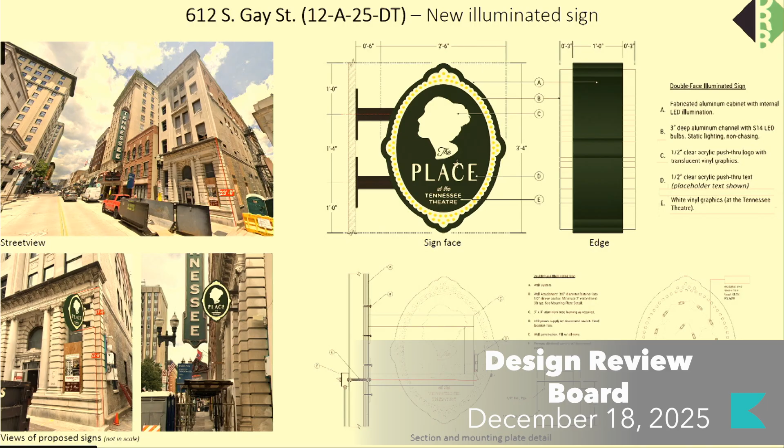Staff recommends approval of Certificate 12A25DT subject to one condition: submit final plans, including the number and spacing of the exposed LED bulbs and the acrylic letters displaying the name of the theater, for review and approval by planning staff.

Thank you, Samuel. Is the applicant present? Yes. Please do. Thank you. There's a little person button on there. There he is. Hello, how about now? Perfect. Okay, great, thanks.

Well, we appreciate your recommendation for approval. As you can see, this sign is kind of a cute little baby cousin of the Tennessee Theater sign. This is the property that you've probably seen in the media that was purchased by the theater two doors down and is to be connected in the rear of this building to the theater auditorium. So there is a connection on the upper floors to the theater itself, but the entrance from Gay Street that you see identified here is a separate small private and sometimes public venue that relates to the Tennessee Theater. So that's why you see a lot of similarities to the theater, but the scale is much diminished.

We don't have chasing lights. It's not the star of the show like the big Tennessee Theater marquee sign. So we appreciate your consideration, and those details that you've asked for, we'd be happy to submit once we've got the shop drawings ready. Okay. Thank you. Do we have any comments from the board?

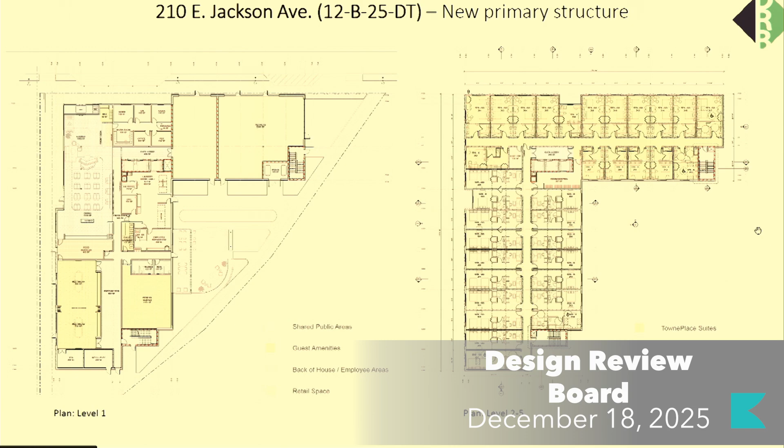The massing of the building includes a clear pedestrian-oriented bottom. The flat roof modern building showcases a contrast between dark gray and light gray color palettes, featuring bays of rib pattern cladding between window bays. The front elevation is divided by a vertical wall with space for public mural art.

The left section features dark concrete blocks and glass storefronts on the ground floor, dark gray brick between the second and fourth floor, and dark gray metal panels on the top 2 floors.

The right section includes glass sections and wood slats on the ground floor, light gray brick on the middle section, and dark gray metal panels on the top floor. Shallow metal canopies are provided at the hotel's main entrance and retail storefronts.

The same color palette continues along other elevations. The dark brick continues along part of the east elevation, while the light gray design extends along part of the west elevation. The rest of the building primarily rests on a foundation of dark concrete blocks with upper floors covered in white fiber cement board and battens.

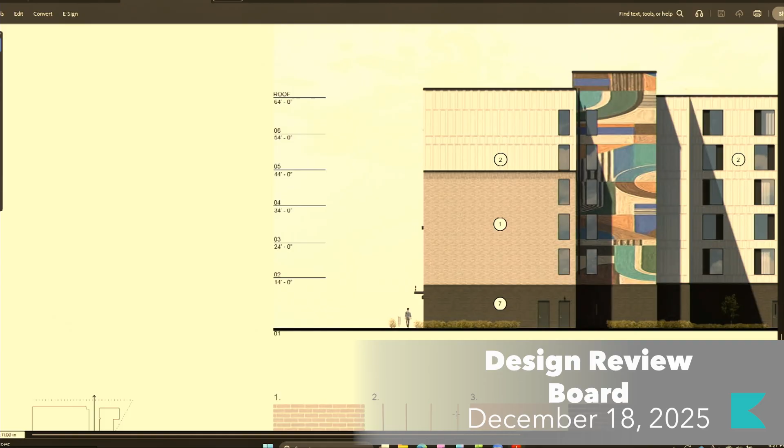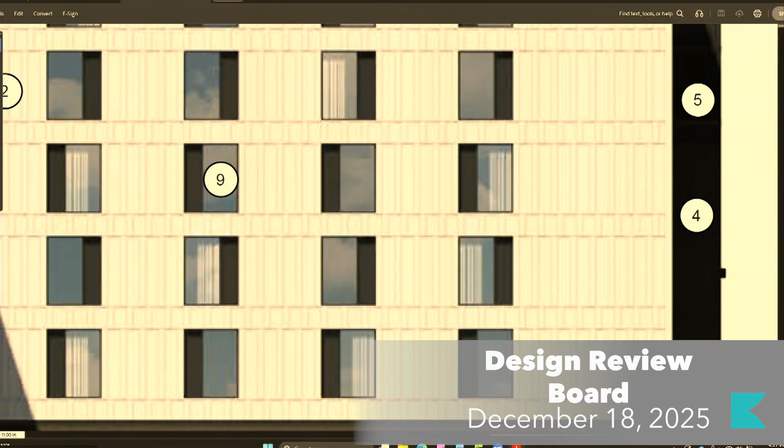Yeah, for me, I'm not sure, I can't speak for Cameron, but it's the horizontal shelves being created for debris piling up. I'd be curious to see some sort of recessed reglet or other joint condition at the horizontals. We do have a reveal at those locations, and we will have to break these at some point naturally, so I'm just trying to make sure I understand what the request is here. I do think we can accommodate what you guys are looking for, I just want to make sure I understand what it is you're looking for.

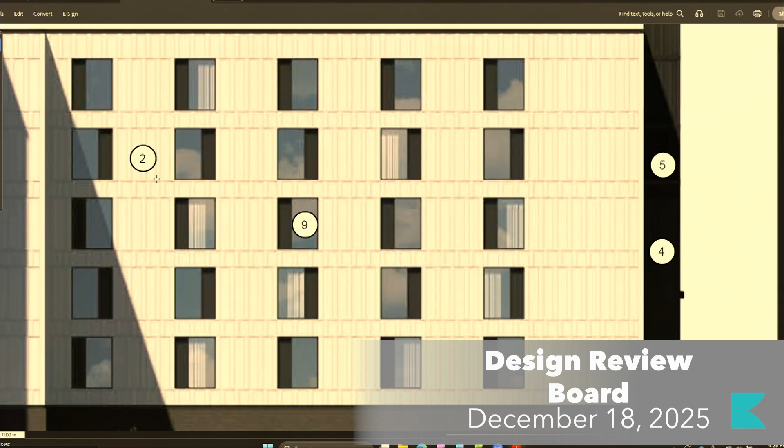I think the clarifying question is, do you have actual fiber cement horizontal pieces, or are those breaks between the panels flashed with some kind of metal joining piece in the horizontal, or are you actually bridging that gap with fiber cement? That horizontal would be a reveal, a flashing reveal, metal fry reglet. That is what that horizontal is. Gotcha, okay, that's very helpful. Thank you.

That's great. My last question is I love how you're incorporating color and art into the overall scheme. I'm curious what the materiality is of that art piece. Is that a vinyl graphic being applied, or is that actually built material into the art piece?

We've done this, or the development team, the client, has done this on other projects where they actually used a real plaster coat, a colored plaster coat. That could be a consideration. What I would recommend, and I should have brought this up before when we were talking about signage, lighting, and landscaping, is that this is also included. We plan to work with a local artist on this piece, and we would defer to them and what they're able to do. Once we find that artist is how I'd respond to that.

So that material is plaster or stucco? Paint, or it could be a plaster coat, depending on their capabilities. We would provide detail on that when we submitted the signage, landscaping, and lighting, because at that point we would have had a chance to interface with the artist. Okay, that's great, I'm glad you're using a local artist as well.

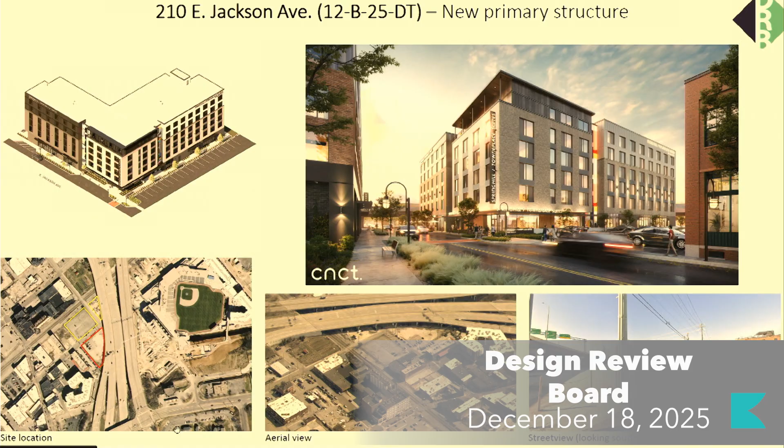We don't typically approve colors, so we approved the mural on the parking garage that Nick Cazana did, both. So I do remember that. Well, we're not an art committee, obviously. I think what the board is most interested in is how they're activating that space, and I think it's up to them ultimately how they do that. We just want to make sure it's not a blank space ultimately. I don't know if it goes to any other public art committee or not. It's not a public facility, I would suspect no.

Okay, but we do approve that it has some sort of color or other material. Yeah, on it, it's got a texture to it. The intent is that it's not just a white or solid color. Yeah, okay.

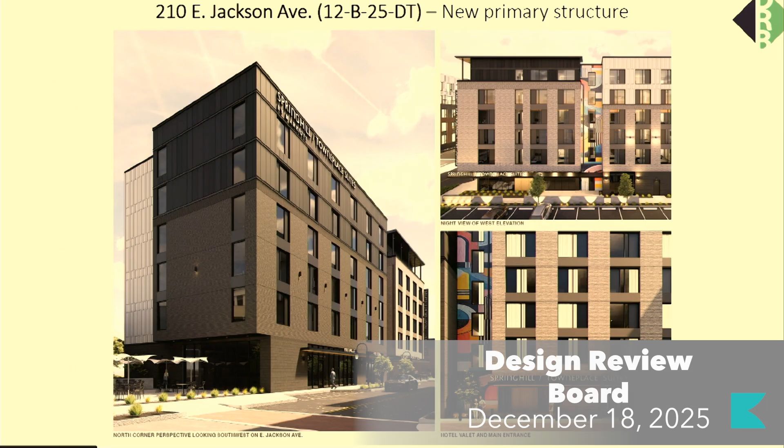So I think as a condition on the motion, I would want that to be stated what that material is. Tony, I agree with you. If we don't know what the art's going to be, and it doesn't go through any public process, it could be anything. So I think it needs to be shown what it's going to be. We did this the other day with the door. We were approving a future door that was to be designed, and we didn't know what the door was. So I think there needs to be a bit more clarity on what the actual object is going to be.

It could be anything. It could be Dolly Parton, which might be cool. I'll go back, though, to the parking garage we approved for Nick Cazana. We didn't approve either mural. We were told that there would be murals. There's a mural on the summer place that didn't come through us at all. So I think it would be irregular for us to decide what mural is appropriate. I wasn't on the board at the time, but I don't know about the Maker Exchange as well, because that has some kind of mural work on it. We did not decide what mural could go there as well.

I don't think we really have the expertise to approve murals, but I do want it to be stated what the material is, and I don't know if that will be part of the COA — is that a condition of the COA? It would have to be on the plan, and I think you could make it a condition that it be some kind of textured, painted, or whatever it might be space.

But the hard part is over time — 10, 15 years down the road, the next operator decides they don't want the mural there anymore, and they paint it a certain color. So longevity-wise, we don't know what it'll be. If it's a space that, if it is more of a solid color, is that really going to be an issue or not? So it's hard to regulate painted surfaces, unfortunately. That's a good point, Mike. You're saying we have to, if we approve it as is, we can't necessarily say this is forever to be a mural. It's to say, if we squint our eyes and it's dark gray, does that still hold up as a design?

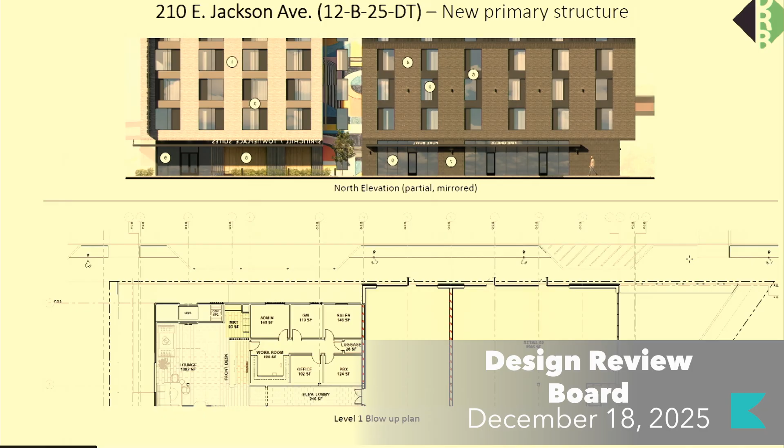Yes, agreed. And I appreciate that note. I think there will be some quality of life changes when we submit the landscape, with that being one of them. I agree that it starts to create a pinch point there. The scale that's shown on the plans is certainly not the intent. The scale is for that to be much closer and tighter to the building, so that you have plenty of room to maneuver for people who are dropping off.

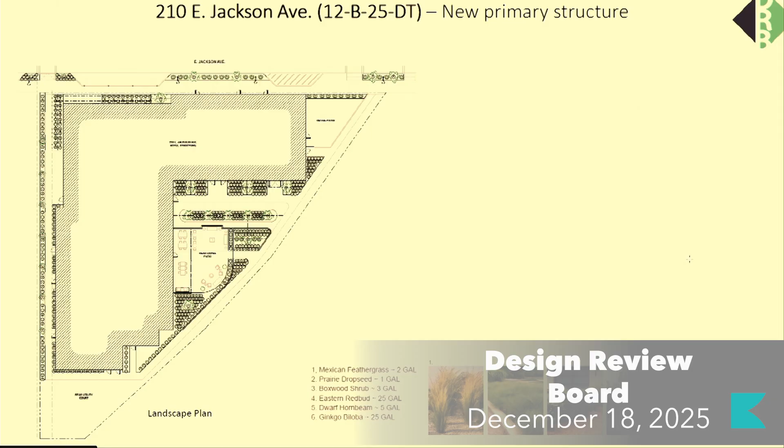Thank you for that. Does the board have any more comments or questions? I have one final question about the rooftop strategy. Is there equipment on the roof, and how tall is your parapet to cover any sort of equipment that's there?

Yes, there would be equipment on the roof. It would be located central to the roof, and the parapet—I could go back and confirm—but it's about 4 feet, and it would cover the sight lines, the vast majority of sight lines, even from James White Parkway. So we'd be looking at it from James White Parkway, that would be the highest point at which somebody would be looking towards the roof.

Is the only equipment that will be there the ones shown on the Axon view? Those two, yes. I will say that equipment is not finalized in terms of the engineering, and so we'll be sure to meet all the standards and requirements for visual barriers, down to the final equipment design. Okay, great. I mean, if it's minimal and central to the roof, I think it wouldn't be visible, but if it is visible, I would definitely want to see what any sort of screening might look like. Yes, our goal would be for it to be screened entirely by the parapet, and so locating and sizing the parapet appropriately to screen that equipment from view is our expectation. As we have the final equipment specification, we'll confirm that.

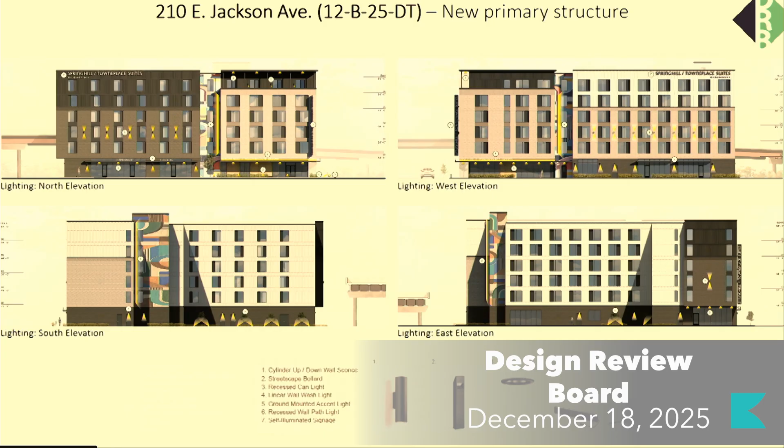Okay, does anybody have anything else? Does anybody not on the board have anything to say? Okay, then we're going to entertain a motion.

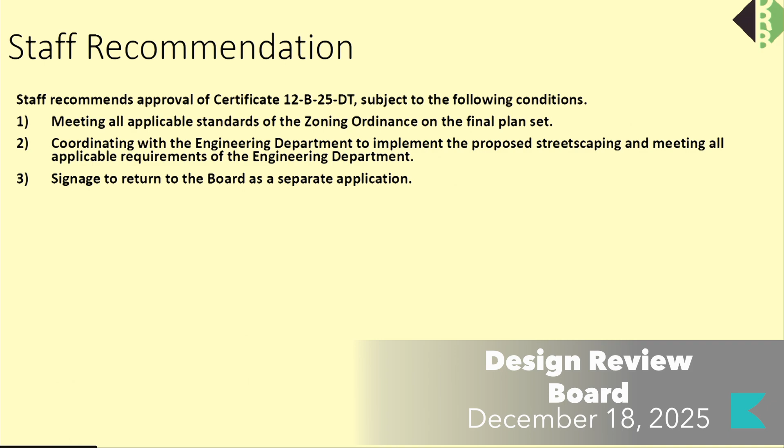I don't think I can make a motion. I would like to make a motion to approve per staff recommendation, but add Tony's element that the material be called out for what the mural will be placed upon, what that material is.

Did you want to add the lighting to condition number 3, to come back? Yes, have the lighting come back with the landscape. I think the material could also come back with that submission as well, right? The material of where the mural's going.

I'm fine with that being staff approval, I think, if you clearly state. We're told that material will be plaster, right? That's what I think I heard. John mentioned several different possibilities. I think if it's plaster and we just go with plaster, that's fine. Can you clarify that as submitted, it's intended to be plaster? Yes. Okay, so calling that material plaster.

I'd second, and want to add, I guess this is the fifth or fourth condition. Do we add another one? Fourth condition, about the board and batten, and this could be staff approval, but to submit an alternate layout or design of the batten, or a flush panel reveal fiber cement system for the fiber cement area of the project.

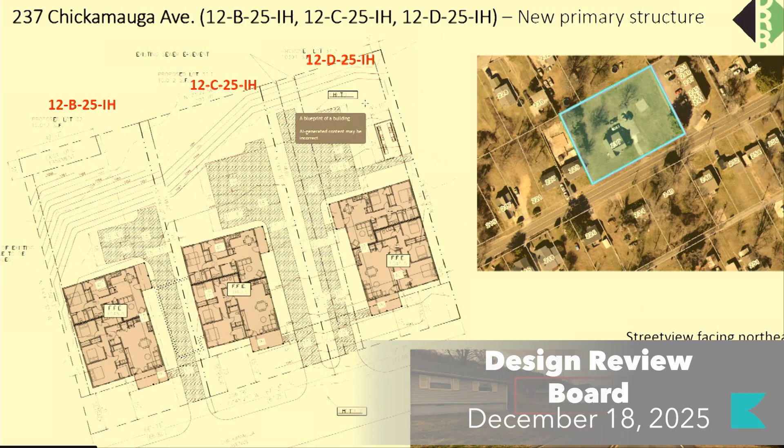Each duplex features a parking pad in the rear, accessed via driveway off of Chickamauga Avenue, which meets guidelines for placement. However, the 5-space parking pad for 12D 25IH is large in scale and exceeds middle housing requirements. The size should be reduced to the minimum for 4 parking spaces.

The 40-foot wide by 55-foot deep duplex is generally wider than most houses on the block and is 5 to 10 feet deeper, except for the adjacent townhouse building. The depth is the maximum approved by middle housing and is appropriate for the duplex form.

A recessed or projecting feature will need to be added to one of the side elevations to meet middle housing standards. Final drawings should include accurate foundation heights and renderings for each duplex.

The depth and supports of the front porch meet the guidelines. The porch should rest on a block foundation instead of open posts.

The roof meets the guidelines. The depicted details should be retained.

All elevations feature sufficient transparency. The lap siding, parge-coated block foundation, and asphalt shingles are appropriate.

However, 3 siding materials are used on the facade, and there is no break in the massing to provide a transition for the proposed board and batten.

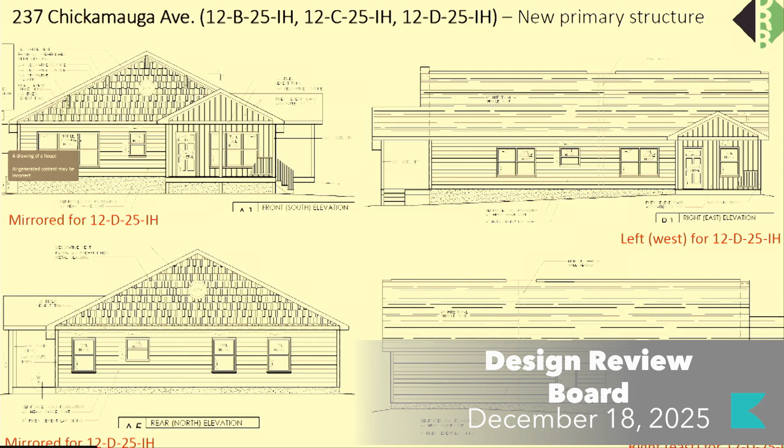Lap siding should be used as the primary siding material along all elevations with the same accent siding in all gable fields. Additional measures should be taken to introduce variety to the 3 almost identical duplexes, which can include variations in roof forms, accent siding, and colors.

So staff is recommending approval of certificates 12B 25IH and 12C 25IH, subject to the same following conditions: the final site plan to meet city engineering standards, the front setback to be increased to meet middle housing standards.

To be approved by staff, meeting Article 4.6 and Article 9.3J, and introducing a recessed or projecting feature on the left elevation to be approved by staff.

The final site plan to include a native or naturalized shade tree in the front and rear yards, using the existing trees unless removal is necessary for construction. Final elevation drawings to include the foundation height along the rear elevation and accurate renderings for the 3 adjacent projects.

The porch to rest on a parge-coated block foundation, accent siding to be used only in the gable fields and to be consistent along all elevations, varying the roof forms, accent siding, and color to differentiate from the identical adjacent duplexes.

To be approved by staff, retaining the rake mold trim, gable base trim, gable vents, architectural brackets, and accent siding, the final plat to reflect the submitted site plan, meet the subdivision regulations, and be approved administratively in a separate application.

Staff is recommending approval of Certificate 12D 25IH, subject to the same conditions, but modifying Condition 1 to add here that the parking pad be reduced to the minimum size for 4 spaces.

Modifying Condition 3 to call out the right elevation, and Condition 5 to require accurate renderings of the mirrored plan.

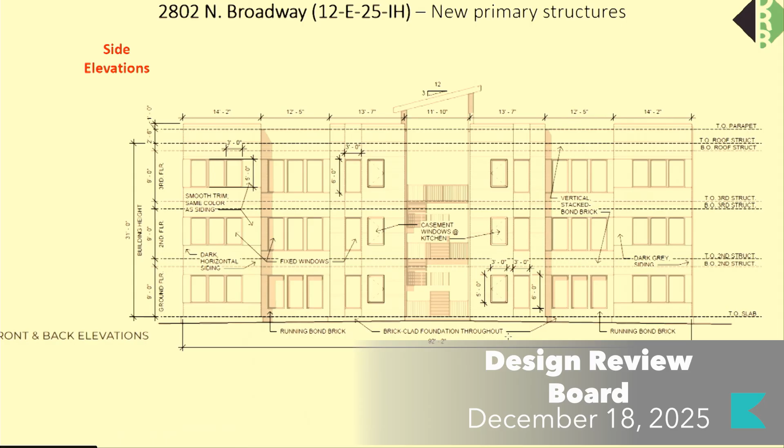Both depicted parking lots are included in this application, but the 3rd building will need to be reviewed in a separate application. Rezoning this adjacent property to RN5 could create additional zoning issues with the current plans. The front and rear elevations are labeled as the side elevations on the plans, and the side elevations are labeled as the front and back elevations. The setbacks are not specified, but there are issues meeting the build-to-zone percentage and side setbacks of the property zoning that should be resolved before the case is approved.

Additionally, the property has a cross slope rising approximately 20 feet from west to east. The grading plan is not clear, and details are not provided for the detention pond, with notes indicating these elements will be finalized later by a civil engineer. The current site plan and setbacks could be significantly affected by necessary revisions to meet city engineering standards and stormwater requirements. The proposed driveway running in front of the buildings and the parking lots adjacent to the buildings does not align with the design guidelines, which state that parking should be provided behind apartments, and that on streets without alleys, parking pads should be at least 20 feet behind the front facade.

Plans review and inspection expressed concerns about the access. The board should discuss the parking and driveway placement and whether additional measures should be taken to reduce the size and visibility of the parking. The landscaping includes the shade trees recommended by the guidelines, shrubs around the perimeters of the buildings, and buffer yards along the south lot line that abuts a rear block of single-family houses.

Existing trees are marked to be preserved along the north and south lot lines, which aligns with guideline recommendations. The applicant provided a tree survey and more landscaping details yesterday, found at the end of your packet. Revisions to the Class A buffer will be necessary to comply with the landscaping ordinance.

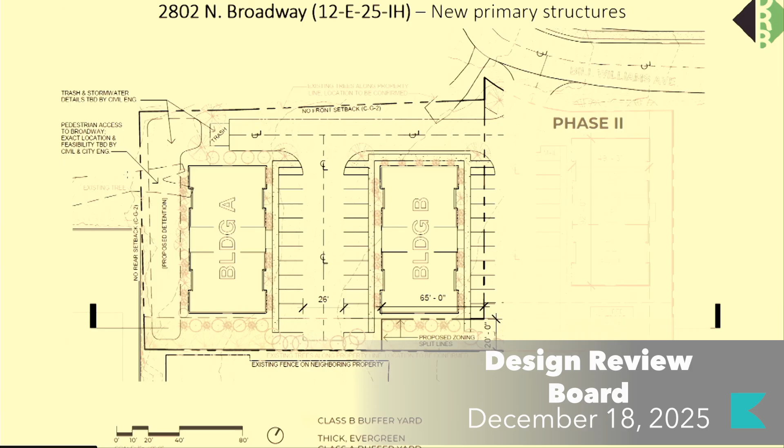The site plan includes sidewalks along the perimeters of the parking lots and a potential pedestrian access to North Broadway over the detention pond, as depicted on the west lot line. Guidelines recommend that new construction feature a walkway to the street. Pedestrian access to Bill Williams Avenue should be provided, and the applicant should coordinate with city engineering to confirm the feasibility of the pedestrian access to North Broadway.

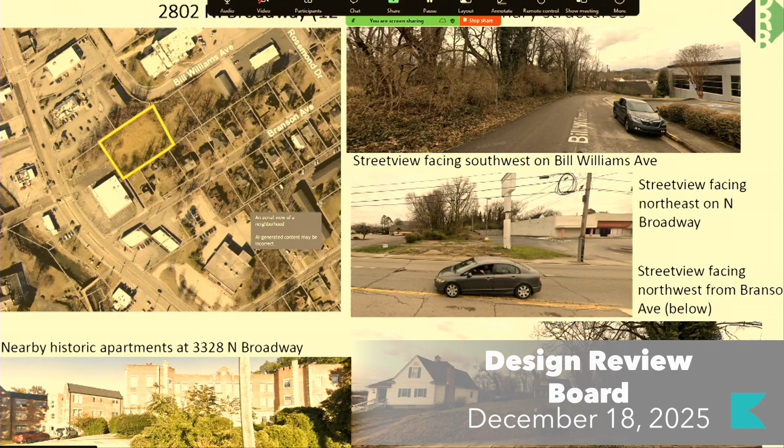The guidelines for multifamily housing recommend that new multifamily buildings be designed in scale and context with the early architectural features of the neighborhood. The block only features commercial and office buildings, and Branson Avenue to the south primarily features craftsman bungalows. Most nearby apartments are 2-story with brick cladding dating from the 60s to the 80s, with the exception of two 3-story Tudor apartment buildings from 1928 at 3328 North Broadway with elaborate parapets and masonry detailing. These are about a half-mile away.

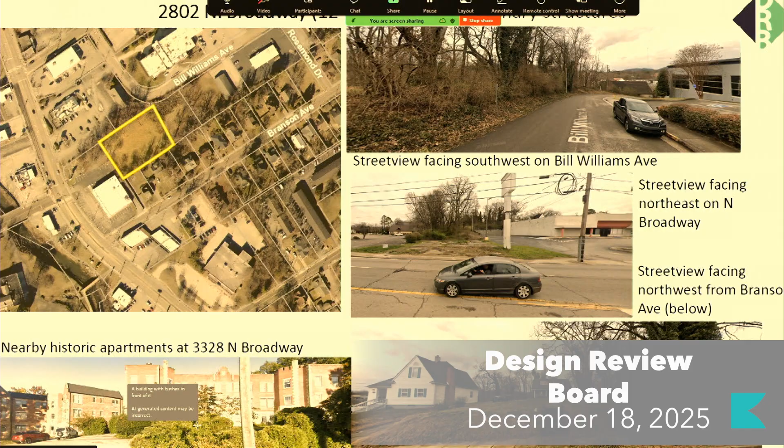The proposed buildings are modern in style, but they incorporate brick cladding with alternating bond profiles to align with the context. Variations in the proposed parapets, such as the crenellations and gables on that historic apartment building, could add visual interest to the front elevations and increase compatibility with surrounding residential architecture. The 3-story height is appropriate within the surrounding non-residential context.

However, separate drawings should be submitted for each elevation, and the final drawing should be unique for each building and accurately depict the foundation along grade.

Guidelines recommend using porches, bays, and breaks in the front facade to create massings divided into separate sections that are proportionally similar to the original houses on the block. This is achieved by the alternating modules, the brick and siding, and the clerestory massing. However, a recess and/or projection should be added to the flat front elevations.

The applicant should coordinate with plans review and inspections about any necessary revisions to meet the principal use standards for multifamily development.

Guidelines for single-family and multifamily construction encourage incorporating porches or stoops with proportions compatible with the context. The open central staircase massing is oriented towards the side yards and is accessed via a small concrete walkway from the parking lot in the east elevations. Multifamily buildings recently approved within the overlay have included porches large enough for seating at shared and individual entries. The board should discuss whether revisions to incorporate a porch element are necessary, such as providing space for seating, emphasizing the entrance on the central massing, or adding a shared patio space on the front elevations.

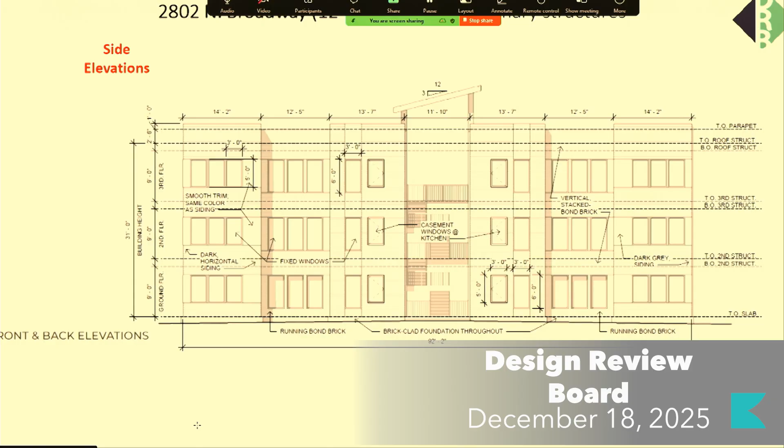The building features a flat roof with a shed roof clerestory, which is appropriate for a modern multifamily building. The side elevations feature shorter parapets on the recessed brick massings, but the parapets on the front and rear elevations do not vary in height. Variations to the parapets and clerestory roof forms could be used to differentiate the buildings and incorporate contextual architectural features. The horizontal siding and brick cladding meet the design guidelines, and the design benefits from the brick detailing, which should be retained.

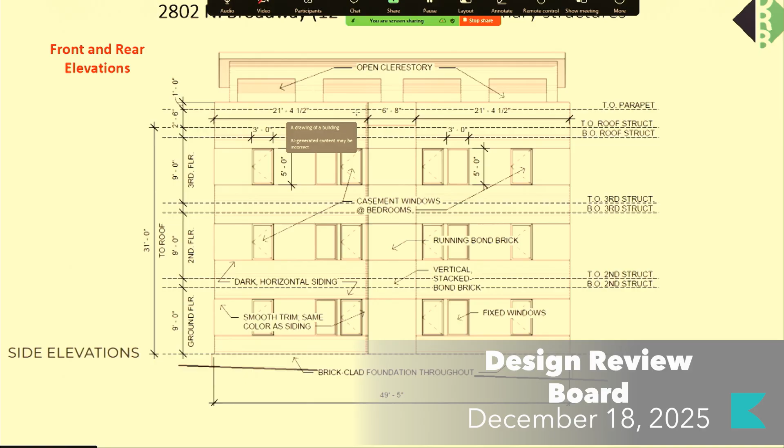Brick masonry or veneer should be used as opposed to thin brick. The 2 apartment buildings, and the third not included in this application, feature an identical design.

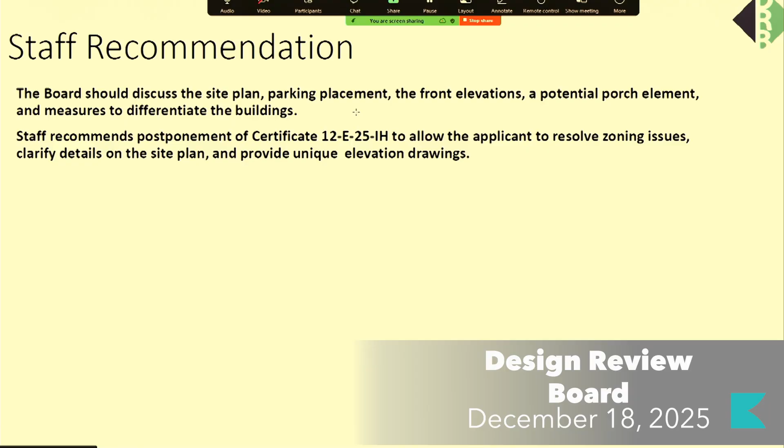The board should discuss the site plan, parking placement, the front elevations, a potential porch element, and measures to differentiate the buildings. Staff is recommending postponement of Certificate 12E25IH to allow the applicant to resolve zoning issues, clarify details on the site plan, and provide unique elevation drawings.

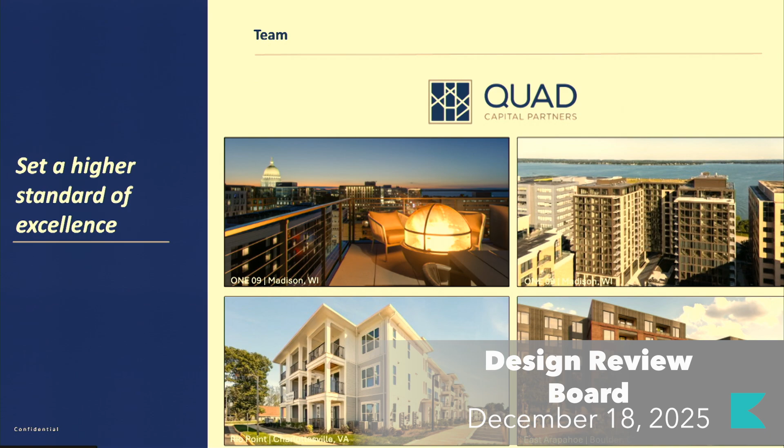So this is just an example - I didn't know how formal tonight was - but an example of some of the projects we're currently delivering or under construction in Madison, Wisconsin, Boulder, Colorado, and Charlottesville, Virginia. And again, it's a family-owned company. We are backed by a pension fund. We are well-capitalized, have a great team engaged here of local and national consultants that have been working on this project for the past almost 9 months.

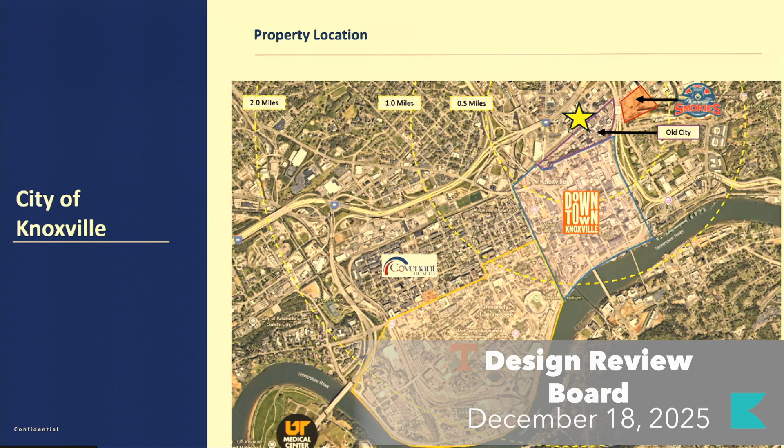We've been having a lot of separate meetings with KCDC and the city of Knoxville, trying to get feedback as we moved throughout the process. So that's been really helpful. These are just orienting slides to understand where the site sits relative to the broader city of Knoxville. And then Michaela, if you go to the next one - excuse me, Melinda - the property itself within Old City.

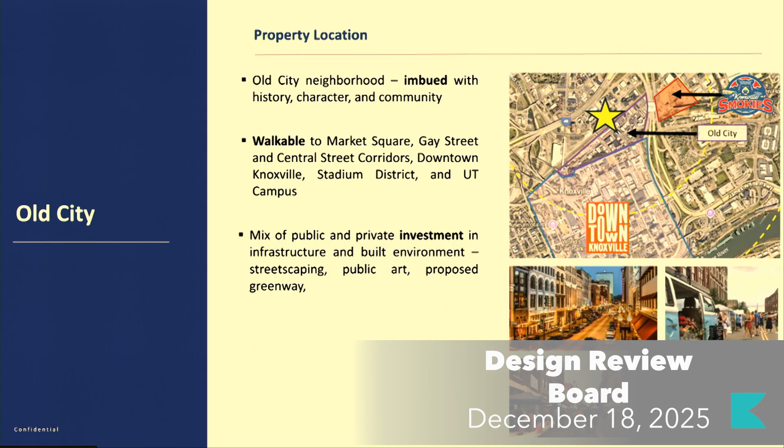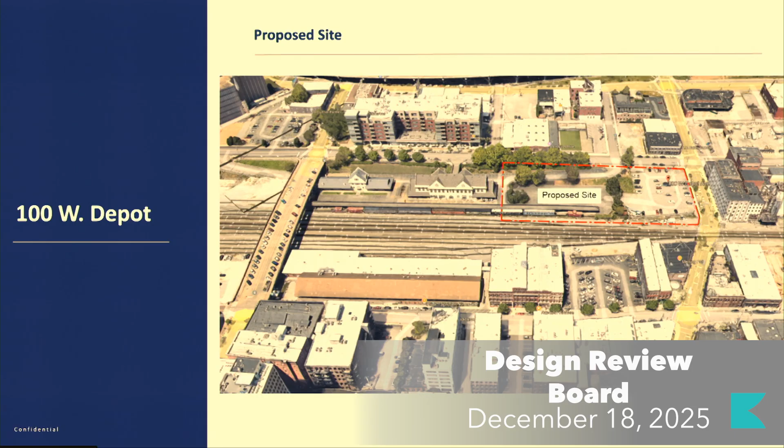We've been coming to Knoxville for the past 9 months, almost a year, and just love the charm and character of this area. When presented with the opportunity for just over 2 acres of an almost flat site that could be very much an infill development, it's super exciting. We're very engaged to be here. We're working closely with the Dewhurst team as our seller, and have been following all the real estate news to understand what the hot button issues are, in conjunction with conversations with local officials, so we can put our best foot forward. We're hoping to do that tonight.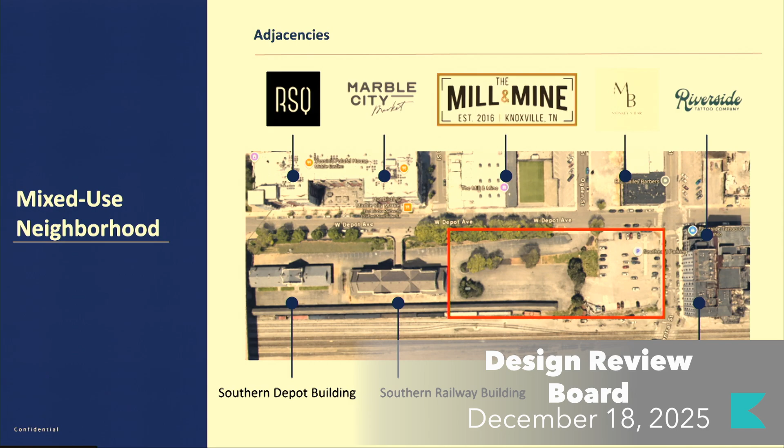If you want to go to the next slide, obviously we're in a mixed-use neighborhood on the north side of the tracks in Old City. We have residential use, a food market, entertainment, bars. We have historic structures to our west with the Southern Depot building and railway building, and residential also to our east with the White Lily residences.

The site characteristics: it's about 2.2 acres, with a very long frontage on Depot, 485 feet, and 175 feet along Central. It's brownfield in character, a former transportation and industrial use. It's currently being used as an over 2-acre parking lot in the middle of the city, and has some grading nuances with it. You can get a sense from the photo in the lower right where at the far west end of the site there's upwards of a 12-foot grading discrepancy between where the sidewalk right-of-way is and where the parking area and grade is, where the existing buildings sit and the parking lots themselves.

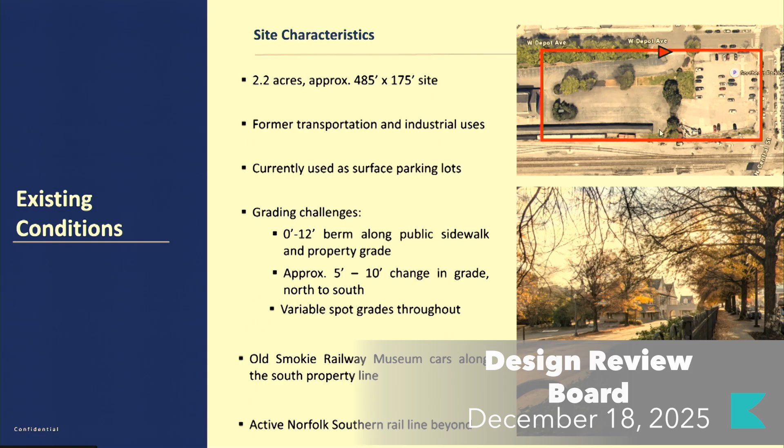There's also about a 5-foot grade change as you move north to south on the property, and we're trying to reconcile all of that in addition to having the rail as a pretty firm boundary on the southern side, to deliver a project that we really want to be successful.

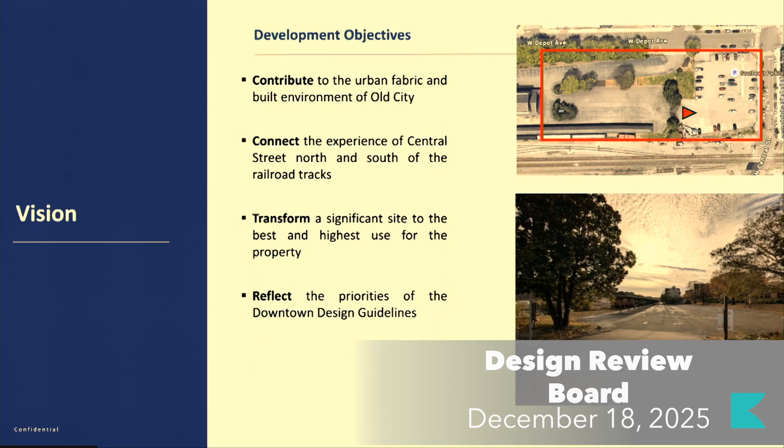In that vein, contributing to the urban fabric of this area, the built environment of Old City, and taking inspiration from the architecture in the immediate area, we're really trying to do something to bridge Central Street as you move from south to north and north to south, and really fill in part of the smile along Central. So it's not just a 2-acre parking lot, but something there to really engage and connect the community and transform the site. We've studied the design guidelines very closely for this warehouse district and for the public and private aspirations, and tried to imbue our design with that.

This is our first floor plan. As I mentioned, it's a long rectangular site, which is really helpful as we're laying out a parking podium. What we're trying to accomplish is as flat a podium as possible, even though we have all these grading changes, so we can tie together the streetscape on the second level, and have the optionality in the future to repurpose these parking plates to the extent a user doesn't need this much parking. They could be adaptively reused because we're providing flat, no-ramping, 2 different points of access to each level of the garage.

If you want to click through these quickly, you'll see it's over 6,700 square feet of retail. The entire frontage of Central Street, wrapping both corners, is activated. We've provided off-street loading so that all of the activity in terms of move-ins, move-outs, refuse, any type of parking access to the first floor is off-street. And we have 2,300 square feet of artist lofts, live-workspaces, and 3 separate units provided along Depot to do 2 things: one is introduce a different housing product type, and two is continue the retail experience and commercial use as you round the corner on Depot. And then we're providing public art that you'll see when we get to the renderings.

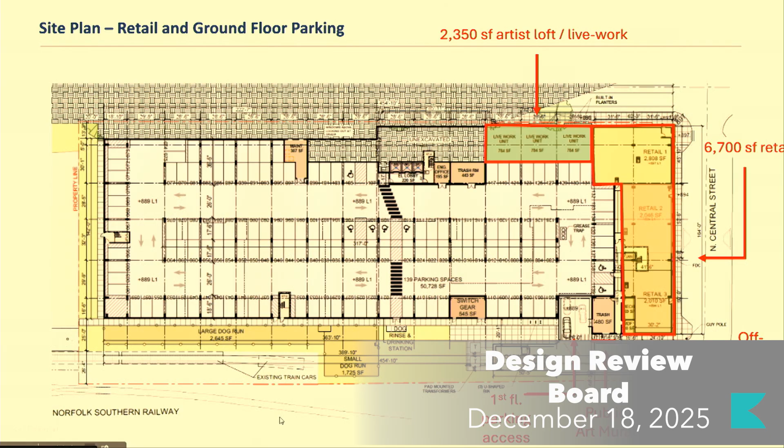As you continue to wrap the corner and tie together with the grades on the west side of the site that are 12 feet or so elevated, where the frontage on Depot connects with our building, this is where we have our access point for our second parking garage.

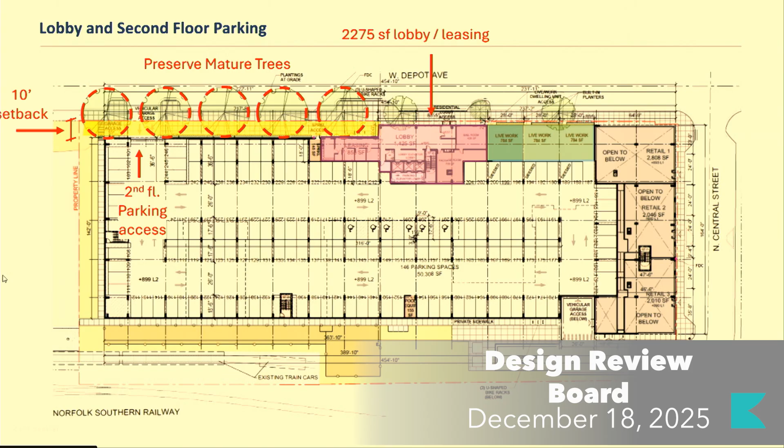We've continued the commercial activation experience by providing our lobby and leasing area at the center of the building in a 2,200 square foot space. We then step the building back about 10 to 12 feet so we can provide significant landscaping to buffer the small portion of our garage exposed on Depot, and we're preserving the mature trees planted there as part of the World's Fair in 1982.

This is our third floor plate, providing amenities. We are providing 270 units. We're working with KCDC right now on a pilot, so 10% of these units are affordable. We've included approximately 6,300 square feet of interior amenities, plus this ample exterior deck amenity with over 17,000 square feet across 2 or 3 separate courtyards. The goal, as reflected in our other products and our team's portfolio history, is really the highest caliber property and experience to attract the best people and the most investment we can make in a community.

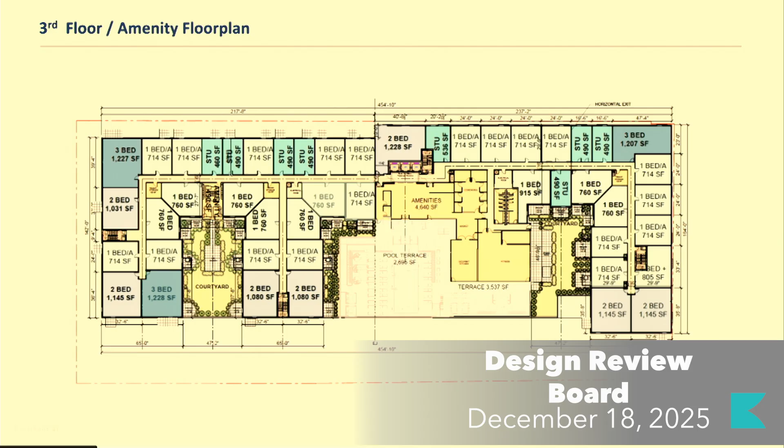It's a mix of studios, 1, 2, 3 bedrooms, and live-work units on the first floor. It's 7 stories total, so 2 stories of a concrete podium with 5 stories of wood frame construction above.

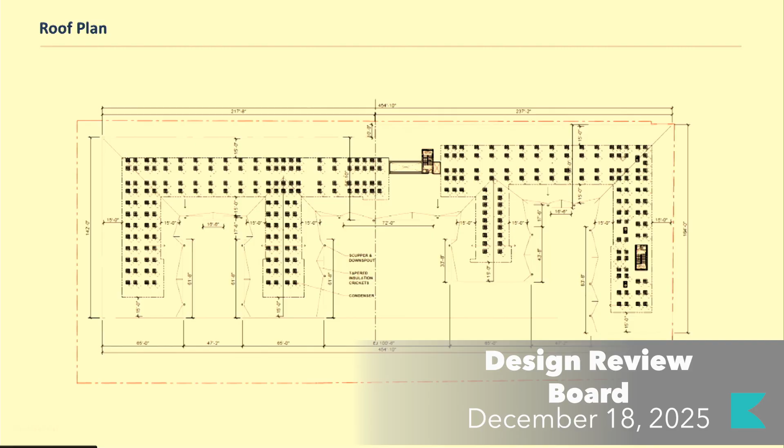We've also included a roof plan. Somebody asked about this previously as well - we have a 15-foot setback, typical for all of our mechanical equipment on the roof, and we don't expect there to be any issues, it's compliant right now. Our architects have done a great job combing through everything.

I'm going to go through a handful of renderings and reiterate some priorities. This is in the Jackson Depot redevelopment area. The goal overall is to expand housing and housing options within Knoxville, and to create a vibrant mixed-use area downtown, connecting Central Street and activating all of Central and a substantial portion of Depot, ultimately taking what's currently used as over 2 acres of parking downtown and investing substantially to revitalize this part.

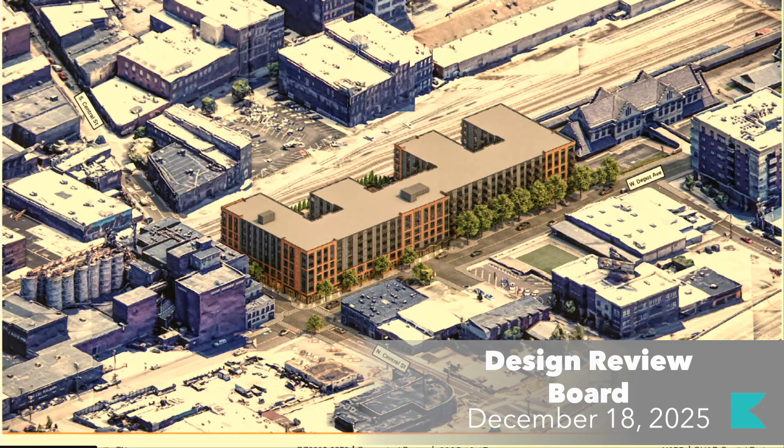If you go to the next slide, you can see the treatment from the other side. Again, get a sense of just how special this courtyard is going to be as it faces all the views of downtown Knoxville and the different setbacks that we have from the rail.

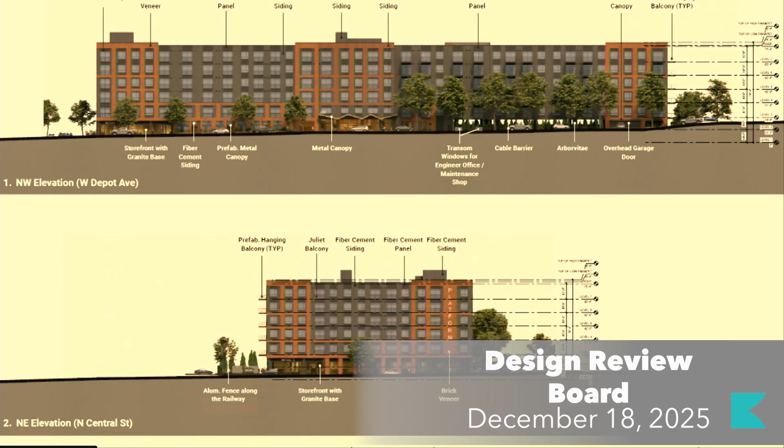We did include a handful of initial materiality slides. Adam can speak to these, but at a high level, the intent is to provide masonry, majority of the fenestration in the building, lots of openings on the first floor, windows in a really nice rhythm as you move down the building, and then masonry and cementitious panel throughout. There's also a substantial amount of screening to the south for the rail lines, and along the portion of the exposed non-mechanically heated garage on Depot.

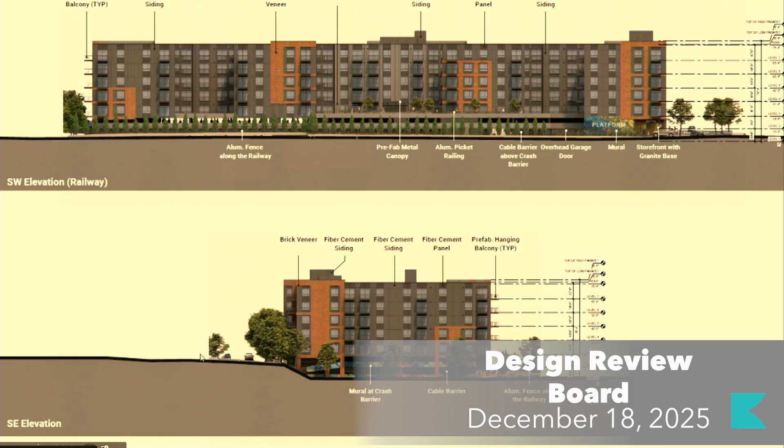That's it, hopefully that was useful. Thank you, we're so excited. Really welcome your feedback. Adam, please feel free to chime in if there's anything you want to mention.